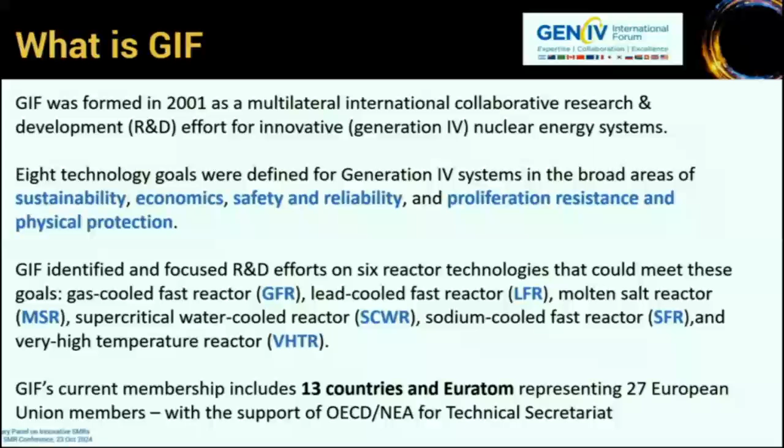GIF's current membership includes 13 countries and Euratom, representing 27 European Union members, and we are supported by OECD NEA as technical secretariat.

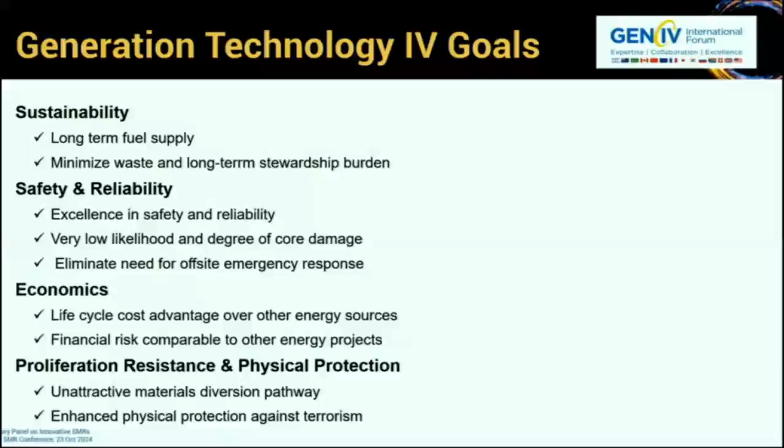In terms of major goals, we have sustainability, meaning long-term fuel supply and minimization of waste and long-term stewardship burden. We focus also on safety and reliability, with excellence in safety and reliability, very low likelihood and degree of core damage, and eliminating the need for off-site emergency response. We also work on economics, with life cycle cost advantage over other energy sources and financial risk comparable to other energy projects. Finally, we work on proliferation resistance and physical protection, in terms of an unattractive material diversion pathway and enhanced physical protection against terrorism.

The key mission for the past 3 years was accelerating the readiness of Gen 4 systems to meet the 2050 net zero goals. We strengthened Gen 4 system features for combating climate change, with flexible operation and non-electric applications, which is an important point we developed. We support transition from R&D to demonstration and deployment in terms of TRL, but also in terms of regulatory readiness and improved economics. We strengthen GIF relevance to industry with industry engagement and close connection with industrial partners in this field, and we also have a senior industry advisory panel.

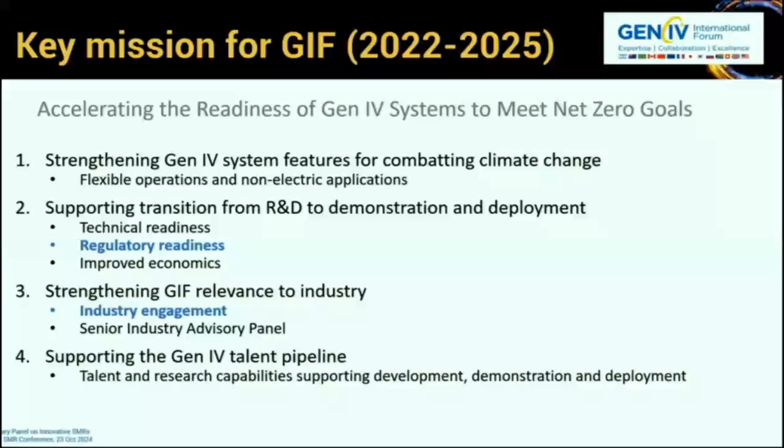And then we support the Gen 4 talent pipeline. It's very important for us to increase the attractiveness of our field to young generations, to young talents, and we support development, demonstration, and deployment in this area.

In terms of SMR and AMR, I think we are all convinced that there is great interest in modular reactors worldwide. SMR, AMR — SMR for us is third generation, AMR is for us fourth generation, and they have great potential from nuclear to X. We'll come back to this definition. We are pretty convinced that they will be included as part of the nuclear energy contribution to meet net zero by 2050, and of course beyond.

I'm pretty sure you know this map, which is a dashboard of NEA showing recently all the projects, roughly 100 different projects in the world dealing with SMR and AMR. We work in this field, providing a foundation for the advancement of SMR and AMR because we share innovation, research in safety and efficiency. We collaborate internationally and have a good vision of how to align long-term sustainability goals. SMR and Generation 4 reactors share many technological and policy objectives, and GIF is currently an important platform for the continued development of SMR and AMR beyond electricity.

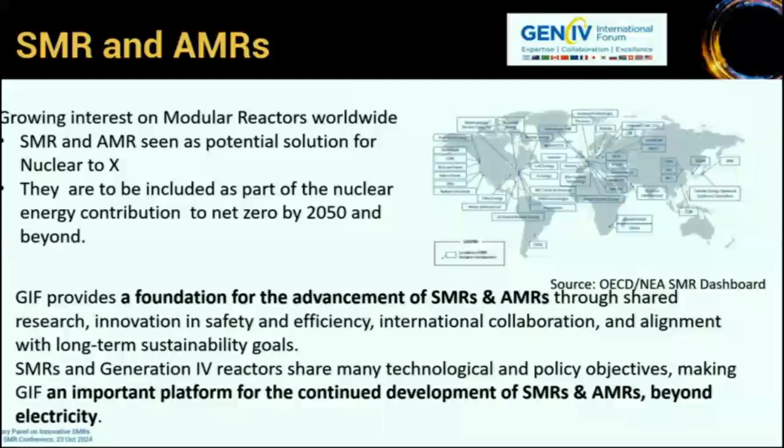Collaboration is key for successful development in this area. Of course, we have great cooperation with IAEA, and the IAEA participation in GIF methodology and working groups is very important for us. We have GIF-IAEA interface meetings to coordinate collaborative efforts, a joint workshop on safety of advanced reactors, and we participate in NHSI, Nuclear Harmonization and Standardization Initiative, which is very important for us.

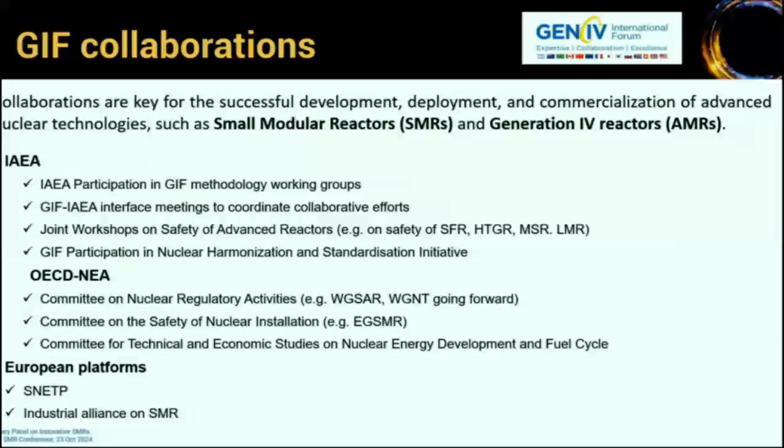Thank you very much for your attention.

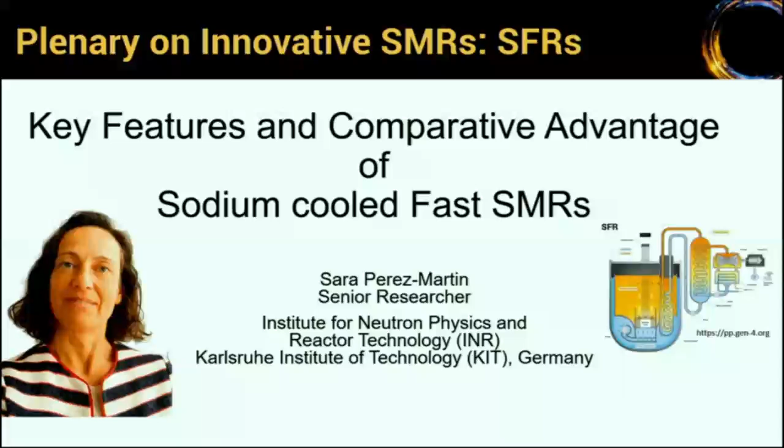Good morning, ladies and gentlemen, and thank you to the organizers of the conference for inviting me to participate in this panel. I will present some key features and comparative advantages of sodium fast reactors for small modular reactors. There are quite different topics where sodium performs well, in terms of fuel for instance, because it operates under a fast spectrum, which is the operation mode of the sodium fast reactor.

This means the production of minor actinides for long-term storage is lower, so it's not needed as much. It could also allow the fuel cycle to be closed, to recycle and transmute. For the core layout, it's foreseen to have good safety performance. We know problem issues about reactivity insertion, so we can tackle these problems by doing a special cake shape for the core. These are key features where we enhance, for instance, the neutron leakage, etc.

I won't go into detail, but just to let you know the key features about this - sodium itself has good qualities for boiling, for instance. Its boiling point is high enough, there's quite a large margin for boiling, and the operation regime is also high. This allows flexibility in design and operation. Heat transfer as well allows for compact cores, which is also good for economics.

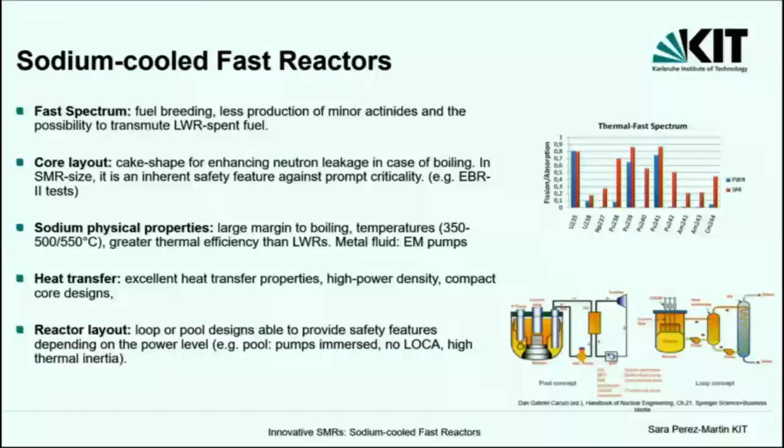The reactor layout presents a variety between loop design or pool design, depending on the option. For instance, for the pool option, the pumps are immersed, meaning no LOCA is possible. It has large inertia, so it provides additional inherent safety features.

For safety itself, as I mentioned, there are different ways to perform these safety measures. Safety measures can be applied at the fuel level by different pin designs, heterogeneous or shorter in the core zone - there are different options. Passive systems are already included because of the natural circulation performance of sodium. The primary loop is under low pressure, so we don't really have to tackle that problem at high pressure. And the water-sodium interaction, which is a chemical reaction we try to avoid, can be addressed by inserting a typical intermediate sodium loop between the primary loop and the power conversion system.

Another key feature to mention is that it has large operational experience commercially, with more than 500 reactor years of experience. It includes also current projects in China, Russia, India, worldwide.

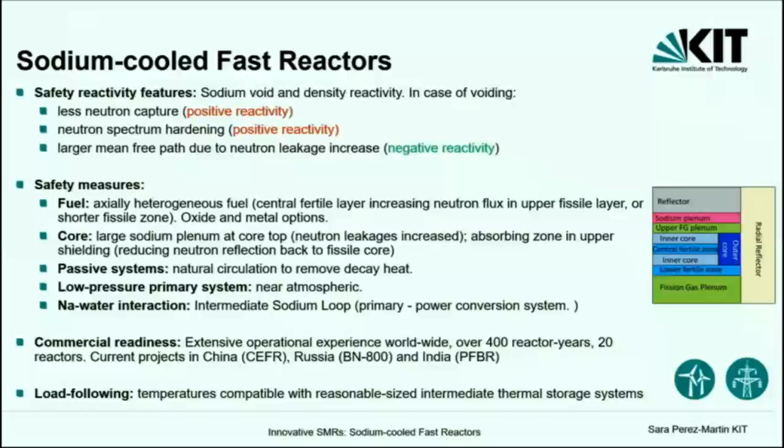I would like to mention as well this last point, load following. Because of the high temperatures, we are talking about sodium temperatures between 350 and 500. This allows an intermediate thermal storage where, with an affordable size, we can store energy and then be in a load following mode.

Supporting the grid stability and the load operation. I present here just an overview of the different safety measures that we have considered in European projects, for instance, how we are targeting the problems and how to solve them by inserting different layers in the core, absorbers, or sodium plenum, etc., so that we can do more safe designs.

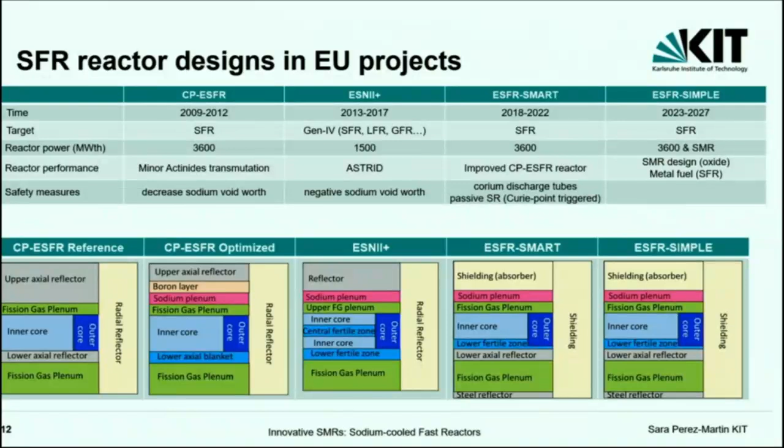In comparison with other reactors, we will see afterwards other coolants, etc. There are comparative advantages in sodium cooled fast reactor. Fast spectrum, as I mentioned at the beginning, produces fewer minor actinides, so compared to thermal spectrum, it has big advantages.

For the temperatures, again, we are talking about high temperature coolant, so the thermal cycle is more efficient. Low pressure is also a good feature, and then the extensive experience, not only commercial but also R&D small facilities, will allow code validation or improving the simulation of the system. This can help in the future for designing more innovative systems.

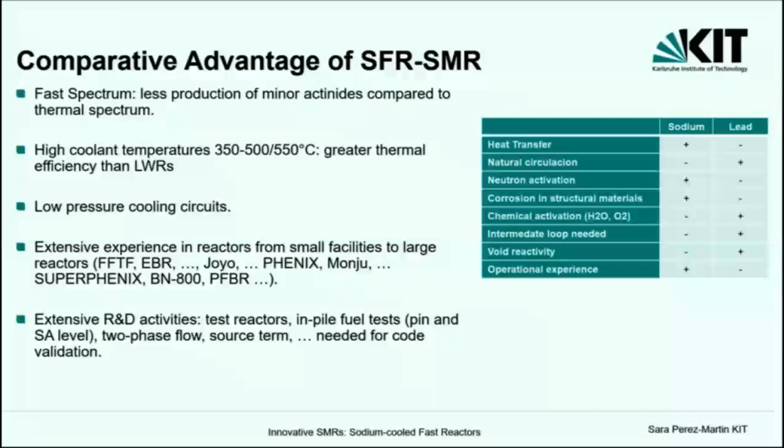As a conclusion, I just wanted to tell you that the sodium fast reactor is ready for being one of the designs for the small modular reactor. Even for this medium-small size reactor, it has larger safety performance compared to the biggest one.

The integration of thermal energy storage is very attractive also for the integration of such systems in the future energy grid. Last point to mention is that for sure we need R&D, collaborative projects, and maybe IAEA is also here as one of the key actors in putting together many research and utilities together for pursuing this. Thank you very much for your attention.

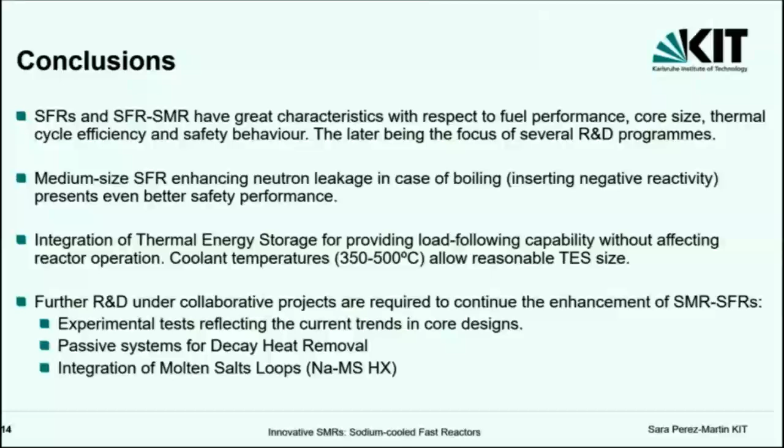Good morning, everybody. Thank you for inviting me to present what we are doing on LFR. First of all, I would like to introduce why we are working on lead. This will help with a better understanding of how our system is moving forward.

As mentioned before by Sara, with lead we can work on closing the fuel cycle, increasing the sustainability of our nuclear system. Thanks to the use of lead, we can also increase safety because we have good performance in natural circulation and heat transfer, and a very good margin in terms of boiling temperature.

This allows us to work our system up to atmospheric pressure, so we don't need to pressurize the systems. Also, thanks to the inherent property of lead, we don't need the intermediate loop as in sodium, because lead works very well with air and water.

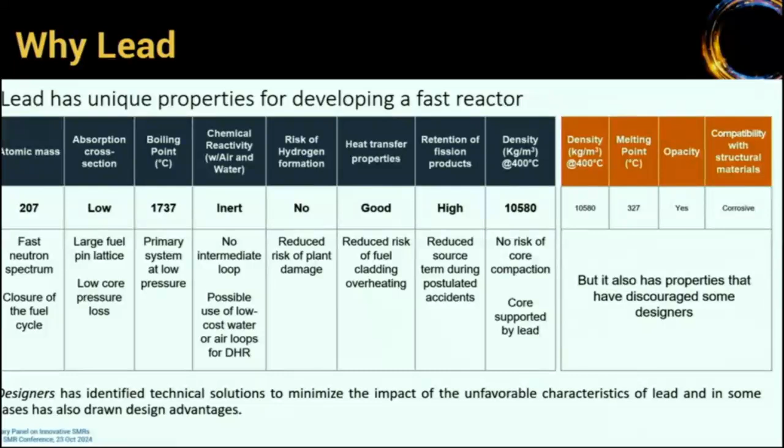So the use of this kind of coolant requires the development of new technologies, new systems and components. So far, several works have been performed worldwide.

First of all, I need to mention the strong activity that we are performing in the frame of the GIF activity. In GIF, we are able to stay in touch with all the players worldwide, so there, Europe is working with Russia, the US, Japan, and others, and China, of course.

It's worth mentioning that in Russia, for example, the Brest reactor is under construction. So the technological readiness level of this technology is large enough for considering its applicability to the market.

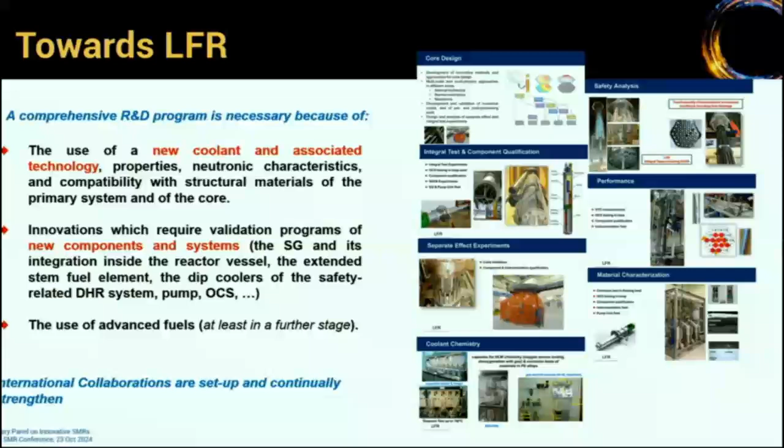As you can see from this slide, many activities are ongoing in Europe in terms of R&D. Many activities have been performed in Italy, Romania, Sweden, Belgium, Germany and other countries. So the technological readiness level of this technology is increasing day by day, and the maturity is growing up quickly. According to that, there are now industries involved in the development of this technology.

Looking forward to support the decarbonization of the energy mix and the energy transition by 2050, it's worth mentioning the activity we performed for several years in Europe, involving Italy, for the Alfred reactor, supported by the Falcon Consortium. This is a consortium in which ENEA, RATEN ICN, and Ansaldo Nucleare have worked for a while developing the technology, and presently we are working with our colleagues from SCK CEN to further focalize the efforts.

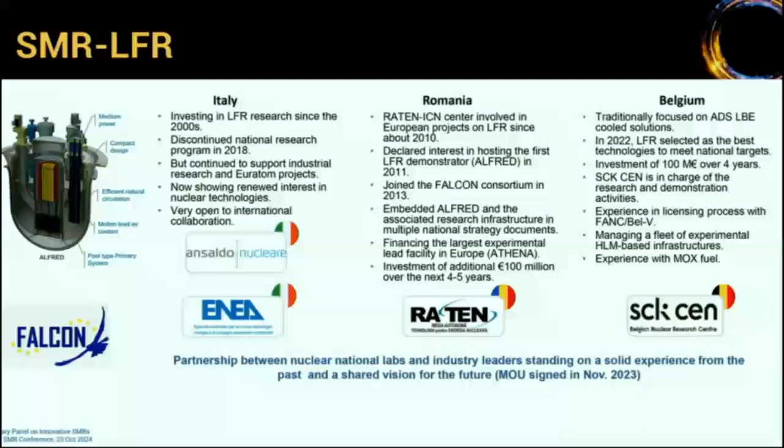Recently, Belgium is moving on the design of SMR LFR. This will allow us the opportunity to focalize the efforts. So presently we are discussing a country agreement between Italy, Romania, and Belgium, starting from the bottom. First of all, we are putting the players on the same table, looking forward to have a common roadmap for the development of SMR LFR.

Another important project to demonstrate the maturity of this technology is the activity performed by the Swedish colleagues. There is the project supported by Blykalla with the Sealer 55. This program is supported not only by the country but also by private investors. The direction they are looking for is still to have a compact primary system cooled by pure lead, but with a difference in the solution for the material. They are developing innovative corrosion tolerant steel, as well as uranium nitride fuel, very similar to what people from Russia are doing for Brest, compared to what people from the Alfred reactor or other players are doing with MOX fuel.

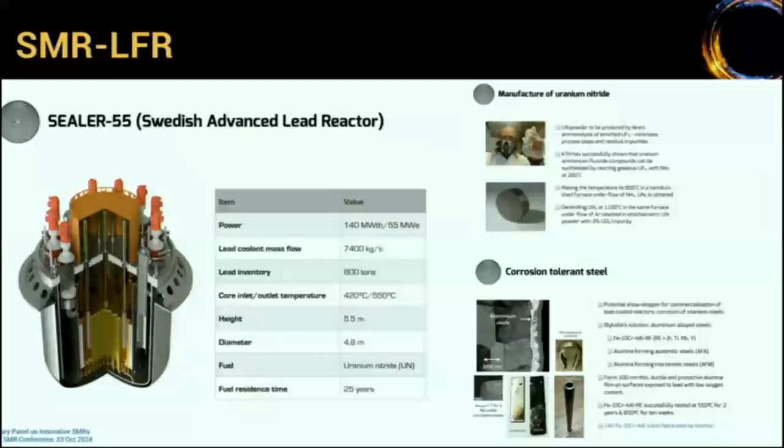Last but not least, it's worth mentioning the big effort being performed by newcleo. We still call this a startup, but it's no more a startup. There are 850 people involved in the project. They are investing more than €500 million in the project, with a huge R&D program, developed in Italy in Brasimone, with the design team in Turin, but with headquarters in France. They are planning not only to build the reactor, but also the MOX factory, looking forward to close the fuel cycle.

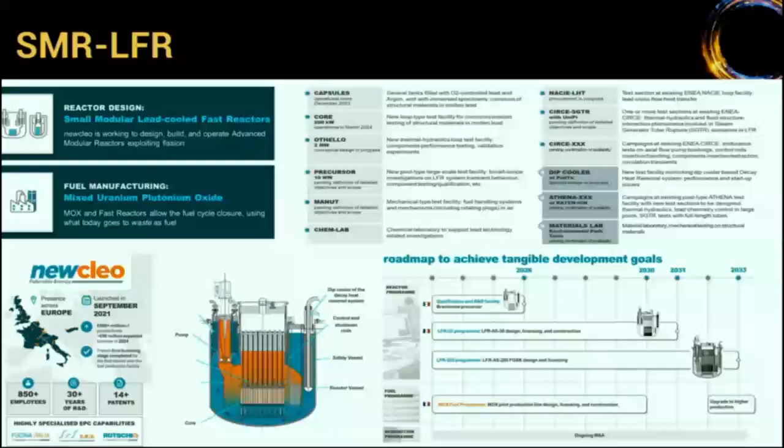As you can see from this slide, they have in mind a strong R&D roadmap with a lot of facilities being constructed this year, and a very aggressive roadmap in which they are looking to put the first kilowatt on the grid by 2033. This is very challenging, but they are making very tough efforts on this, and it demonstrates how the LFR is ready for the market. Thank you for your attention.

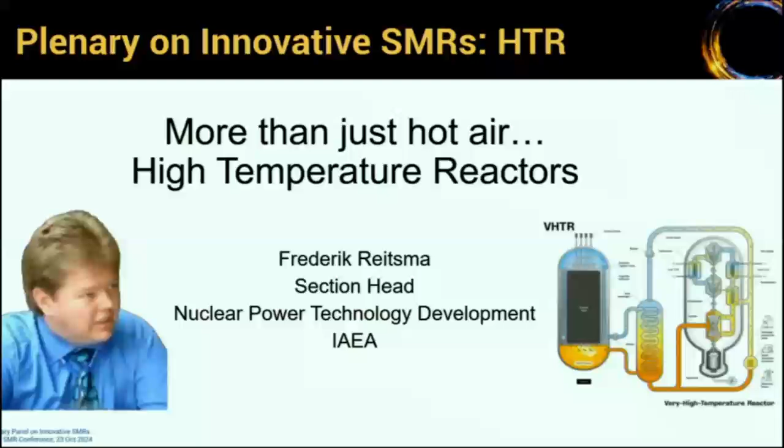Thank you, Vladimir. I thought to title this 'more than just hot air.' Hopefully in the next few slides I will show you that this is not only a promise, but has been realized today, and also show the challenges that lie ahead as we want to go to very high temperature gas reactors, and not only high temperature reactors.

So what's the reason people are interested in high temperature reactors? I think the increased temperature has been highlighted by many of the speakers for the other technologies. High temperature gas-cooled reactors with an outlet of 750 and above get the advantage of good increase in efficiency if you use a steam generator, and in the future, if you go to a direct gas turbine, it can be substantially better. This is for electricity generation.

It also has a well-established modular high-temperature gas-cooled reactor design philosophy, and if you follow this philosophy, you can realize many of the inherent safety characteristics of the technology. I think today all the designers of high-temperature gas-cooled reactors follow this philosophy, and therefore still have to do all the work to show that this is true, but more or less can claim that decay heat removal can be achieved by all natural means, that you have self-limiting power excursions due to a large negative temperature coefficient, and more importantly, very large temperature margins for your fuel. Of course, you have helium that is not reactive and doesn't influence the reactivity.

So you can show that you can design a reactor to have no large release, and that all the radioactivity is contained within your coated particle fuel. And therefore, a case has been put to a regulator that the EPZ can be on the site boundary, and that was accepted.

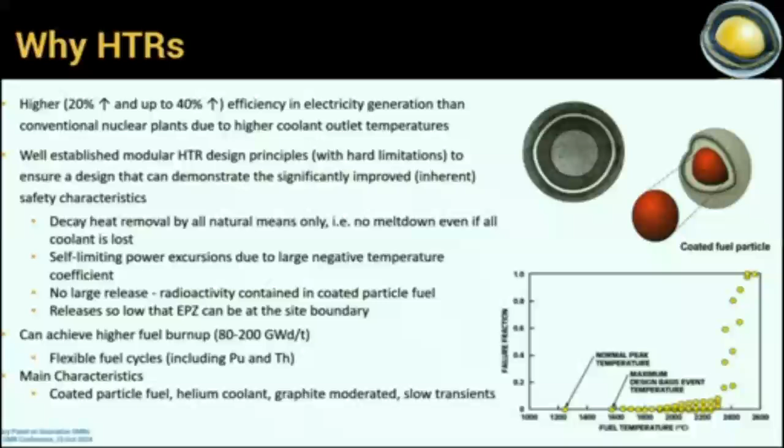What I showed on the right is a graph showing releases from fuel at different temperatures. Basically, the operating temperature of fuel is typically lower than 1,000 degrees. Tests have been done up to 1,600, showing you don't have any additional release in accident conditions. The main releases only occur above 1,800 degrees, so there are large margins to significant fission product release coming from the coated particle fuel.

So my next message: HTGRs are ready for deployment. There have been several test reactors over the years, experimental reactors, some prototype reactors. There are currently 2 test reactors, one in Japan and the HTR-10 in China, that have gone through many safety tests and safety demonstrations. So there's a long development history of high-temperature gas-cooled reactors.

We have 2 types, the pebble bed shown on the right, and the prismatic or block type shown on the left. They share many of the same characteristics, such as the triso fuel and the slow transients due to a massive amount of graphite. In Shidao Bay, China, the HTR-PM 200, 2 units connected to a single power turbine, has been in commercial operation since December 2023.

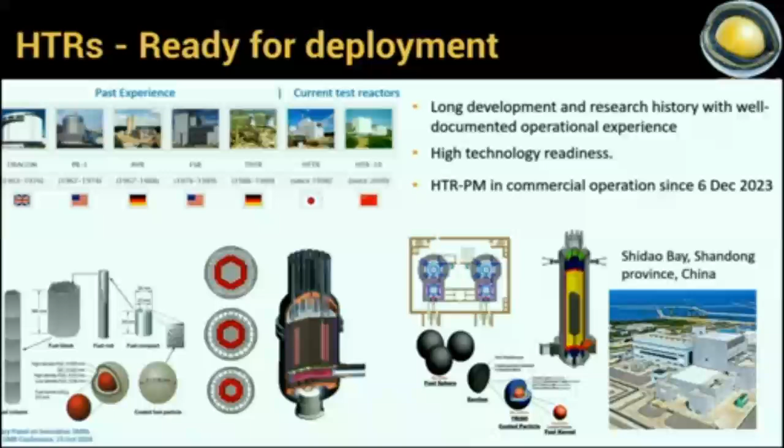So what are the challenges? I think typically we require high enrichment for HTGRs, about 8% minimum. Other designs go up to high-assay LEU to achieve the very high burn-up shown. A closed fuel cycle is also not possible in the thermal spectrum, although there's quite good utilization of plutonium, and it is a quite effective plutonium burner as well.

To close the cycle, of course, you need reprocessing, and that's not been demonstrated at large scale, that the fuel can be reprocessed, although there's some good patents and demonstrations done in the past.

The reactors, by design, to have these features, have a very low power density, about 30 times lower than a typical light water reactor. So of course, to achieve a sizable reactor, you need very big components, as shown on the right. I think the cost of the coated particle fuel is also, because it's quite complex, always slightly higher than other fuel options.

I think the most important characteristics of HTGRs are the high temperatures, and therefore the process heat applications of this technology. We know that electricity is only responsible for less than 40% of CO2 emissions, so the other 60% needs to be addressed, and that's where high temperature gas-cooled reactors can make a huge difference along with other technologies that also achieve high temperatures. 50% of user industrial processes require less than 10 megawatt capability, which also shows that SMRs, and therefore HTGRs, which are all currently SMRs, are a good solution.

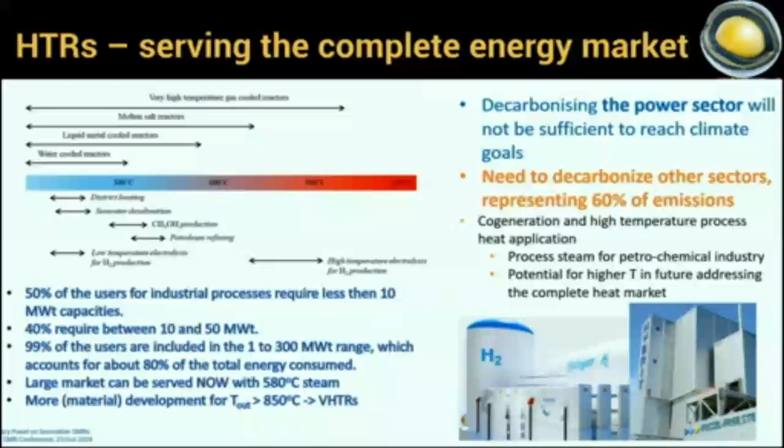So the interest - many different designs throughout the world, many projects at different stages of development, some of them already 20 years in, achieving good manufacturing of fuel, for example. More recently we have some newcomers, for example Jimmy, that was successful in getting phase 2 funding from the France 2030 project. We all heard about Hatch that signed up with X-Energy for process heat applications for their facilities, and now the new announcements we heard about in the introduction.

The HTR-PM performed, on this full scale, a loss of cooling accident simulation, really proving that this inherent safety characteristic is not only true for the small test reactors or for the AVR that did this already in the 70s, but also now on the full prototype or commercial demonstration. And also the Shidao HTR-PM, in April, was connected to a local district heating system, also demonstrating this capability.

And in August it was announced that a large project with 2 light water reactors and 6 units of HTGRs in one plant will be developed for...

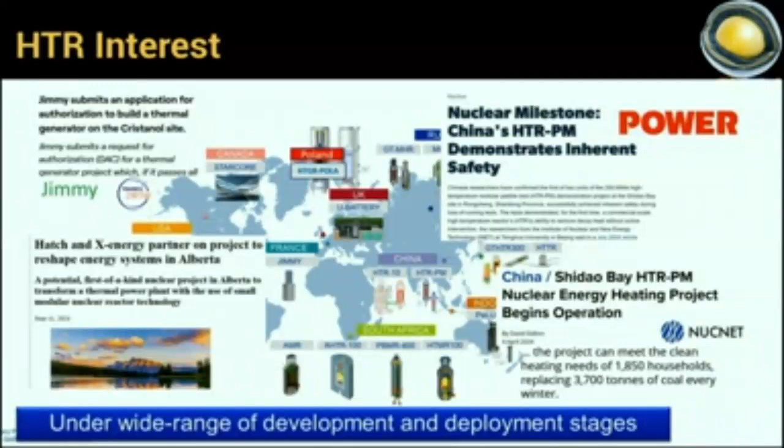Of course, you get dose effects on your vessel and structure. And it still requires a lot of R&D.

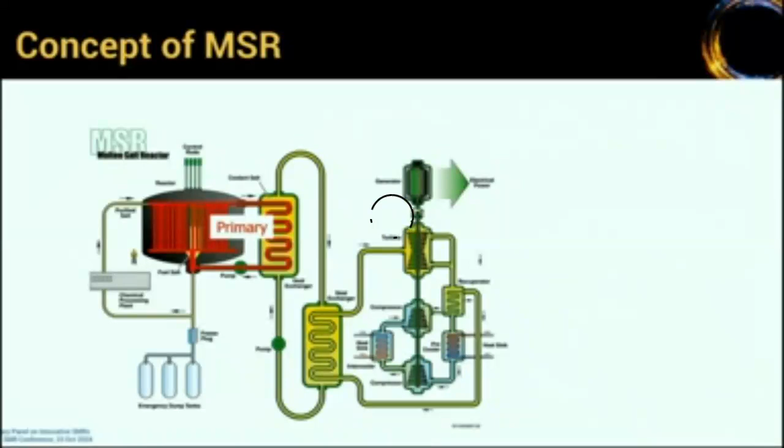Thank you for the possibility to speak here about the MSR. For those of you who don't know how the molten salt reactor works, you have a primary circuit with a fluoride or chloride salt with uranium and thorium dissolved in it, or uranium-plutonium or only plutonium, and the heat is extracted via a secondary circuit to the energy conversion system.

Because of the high temperature, this can be a Brayton cycle instead of a Rankine. There are a few options only accessible for the molten salt reactor.

That is, you can withdraw a little bit of the salt every day, every week, clean it and pass it back to the reactor core.

And you can also dump the molten salt in emergency dump tanks, or you can, because of the liquid form of the fuel, extract the decay heat with other means. But in any case, because it's liquid, it's easier than in other reactors, we believe.

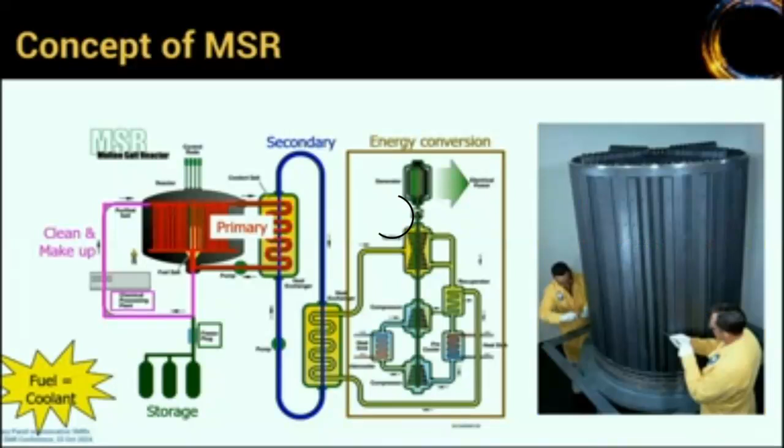There's not one molten salt reactor. There's a large variety of molten salt reactors. When you dive into the liquid fuel reactor science and technology, you get all different kinds of possibilities that you can utilize.

Similar to the large variety of solid fuel reactors that we have, you can have molten salt cooled reactors, molten salt reactors with a thermal spectrum with graphite as moderator or other moderators. You can have fast reactors with fluoride salts, chloride salts, etc.

So this gives you a large variety of options. And that's why I also tend to look at the Generation 4 reactors in a different way: on one side you have solid fuel reactors with a large variety of options of fuels and coolants, and you have molten salt reactors, liquid fuel reactors, with also a similar variety of options.

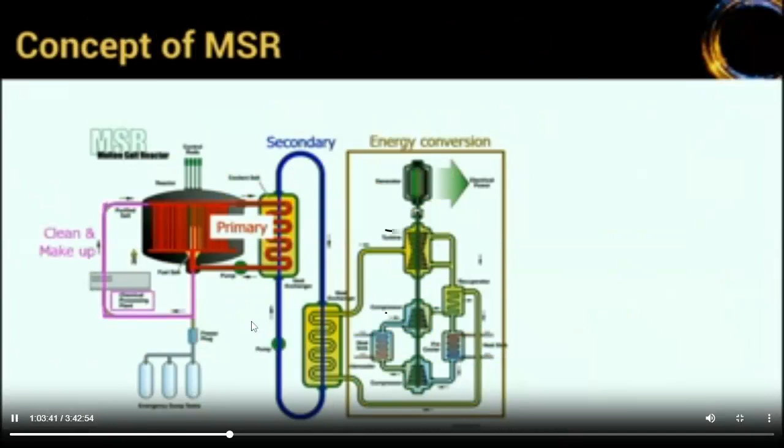What are now the big themes in a molten salt reactor that we need to address? First of all, there is, of course, a material...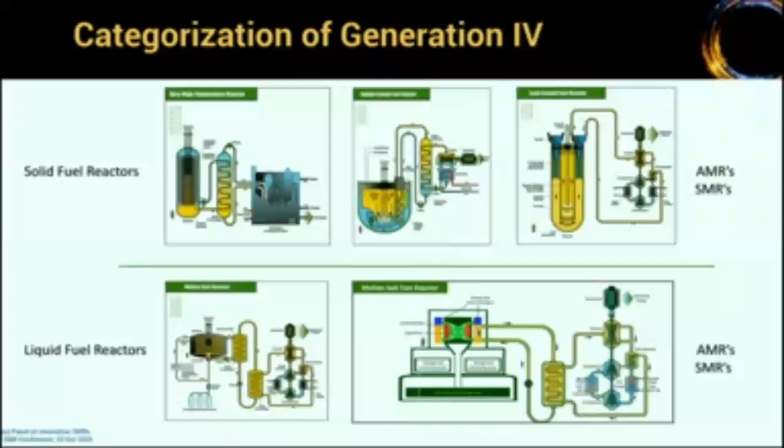What are now the big themes in a molten salt reactor that we need to address? First of all, there is of course a material research area, to understand the corrosion of materials in contact with salts and how you can avoid this corrosion.

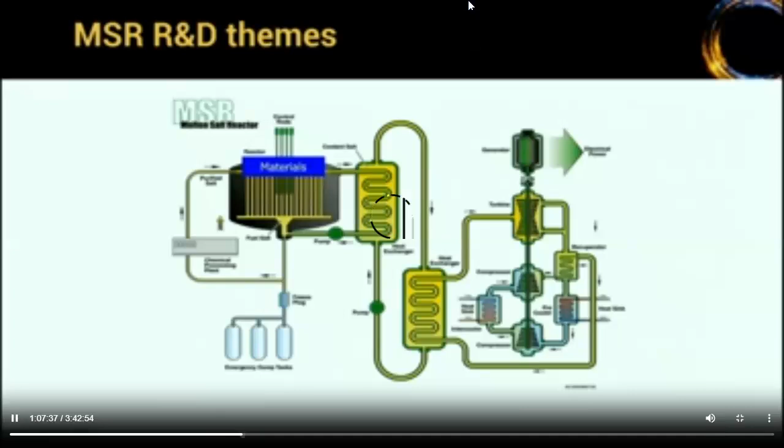So on one hand it's looking at better structural materials, on the other hand also looking at mechanisms to clean the salt, how to get rid of the gaseous fission products, how to get rid of the noble metals, other lanthanides, for example, in your salt. This all is a chemical processing plant.